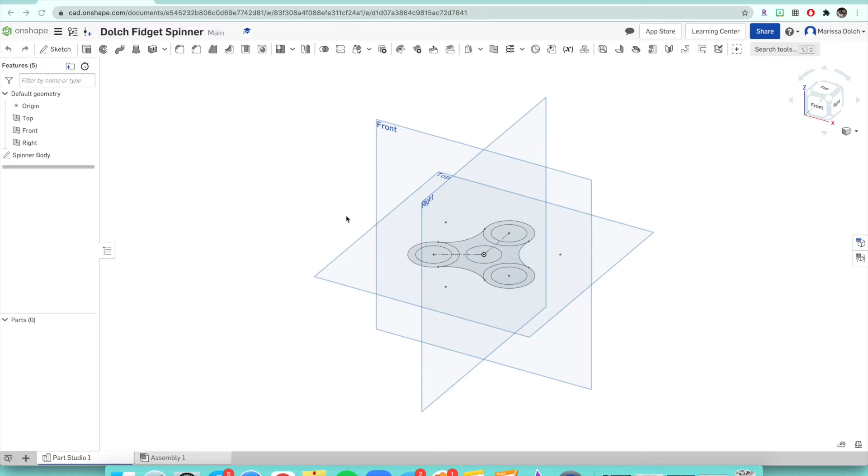Everyone, this is part 2 of the fidget spinner 5-part series, and now we are on to extruding our fidget spinner body. In the last video we created this beautiful sketch of our fidget spinner, and now it's time for the fun part: to see it come to life and extrude this.

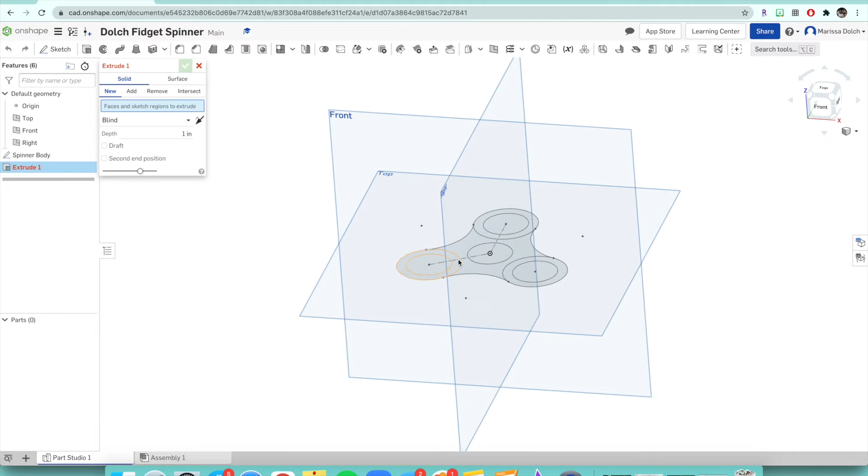So what we're going to do is click on the extrude button on the top right here. Now we have to select what we want to extrude. This part is very important, so I'm going to zoom in a little closer so you can see. We want to make sure that we only extrude everything but the inner holes.

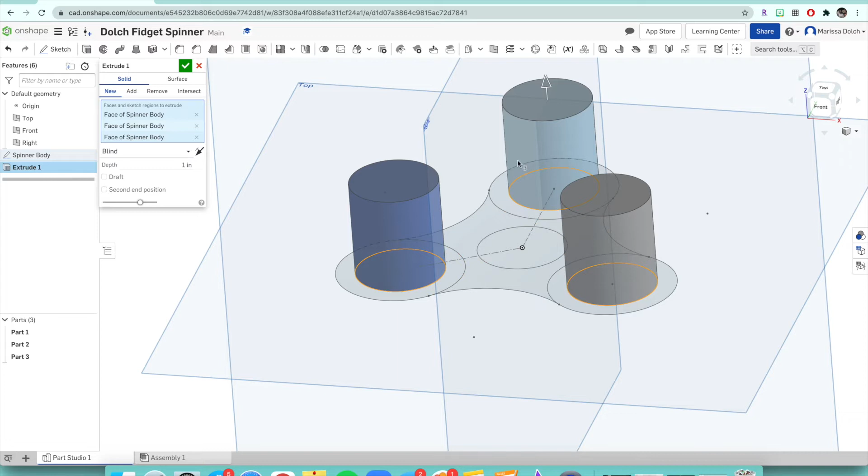So we don't want to extrude this, we don't want to extrude this, and we do not want to extrude this, right? We want those holes to have nothing in them. We want them to be hollow. We don't want any material filling up these holes. So let me get rid of that. That is what not to do.

What to do is click on this body part right here. It's okay that this is highlighted here, and we want something that looks like that. Now what we want to do, since this is still hollow, is fill in the rest of this circle so it goes completely around. So you're not going to click in here, because it's going to do that.

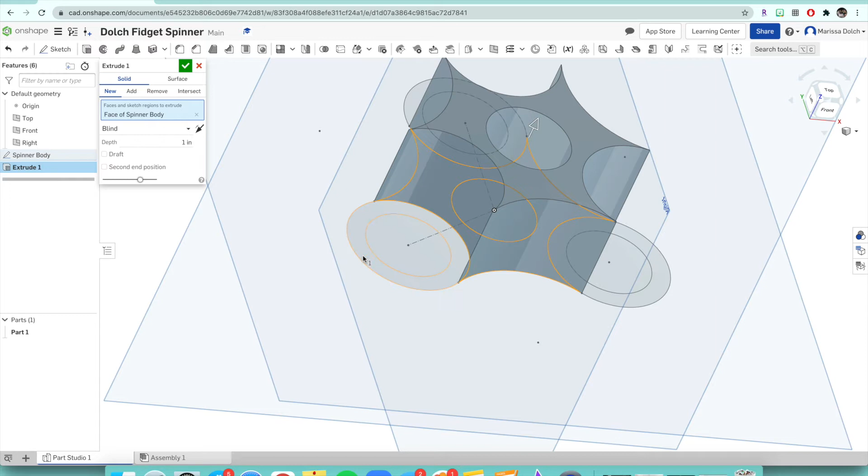But what we do want to do is click on that donut of the circle - not just the inner, both the inner and the outer. So it looks like this. And you're going to do that for all 3 of these holes, so it looks something like that. That is what your fidget spinner should look like so far.

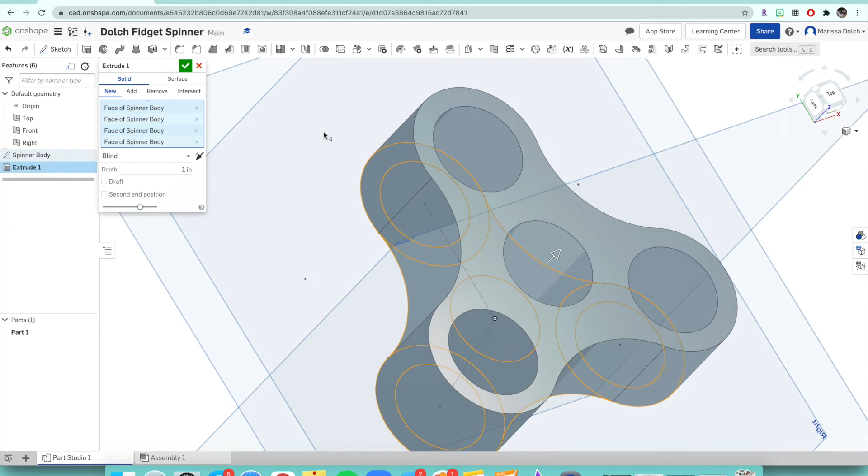So I'll just spin around again. None of these holes should be filled. If something's filled, you could always go over here and click one of the X's and figure out which one is the hole that you filled. We want all of these to be hollow. Once you're good with that, we're going to rename this extrusion and name it spinner body so we know if we have to go back and change something, we can.

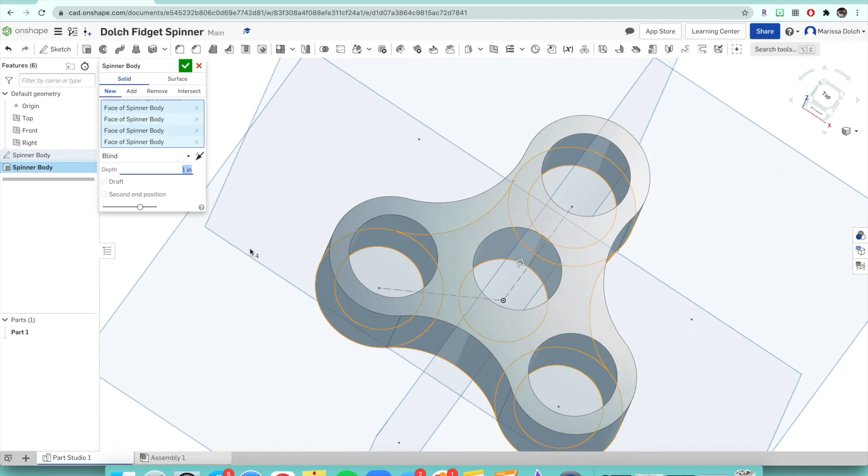Then what we're going to do is just change the depth. Right now it says 1 inch, which is kind of tall. If we're looking at this, it's kind of up there. So we're going to drop it down to 0.35, which is actually the standard size of a fidget spinner. If we look at it now, it definitely looks better - it's not as high up and it looks more legit. So now we're going to click that green check mark and we are good.

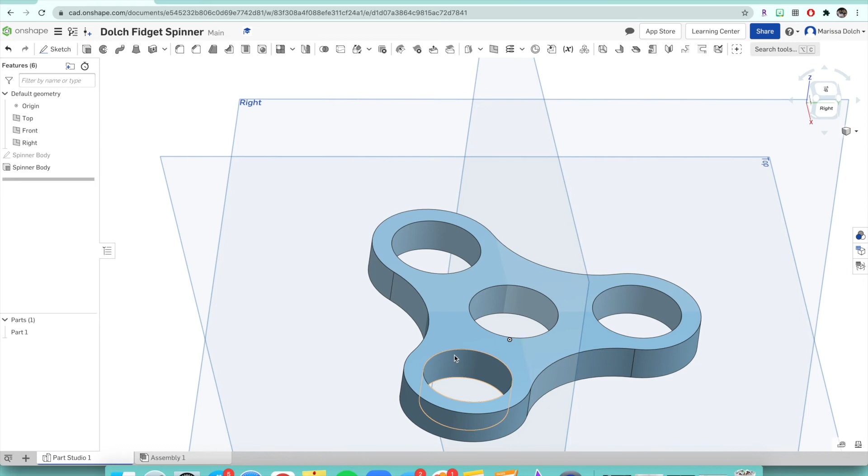Now the only other thing we're going to do in this part is round out these edges here, on the outer edges, not the inner edges. We don't want to mess up those beautiful circular holes yet. We just want to do it on the outer part of this fidget spinner, where your hand goes, because we don't want anything sharp - right now this is kind of rigid for your hand to lay on. We want this to have the safety factor, we don't want this to be dangerous for anyone to touch. So we want to round out and smooth out the edges like we've done with our other intro projects.

To do that, we're going to click on that fillet tool up on the top, and we are going to fillet the edges, which I'm going to change first so you can see, to 0.1, and click enter. Now we have to click on an entity to fillet. As soon as you see this, you'll see that only this line glows yellow, right? You're going to be like, oh Ms. Dolch, that's only that one part, that one little curve there. I don't want that, I want to do all the parts at once, right? Of course.

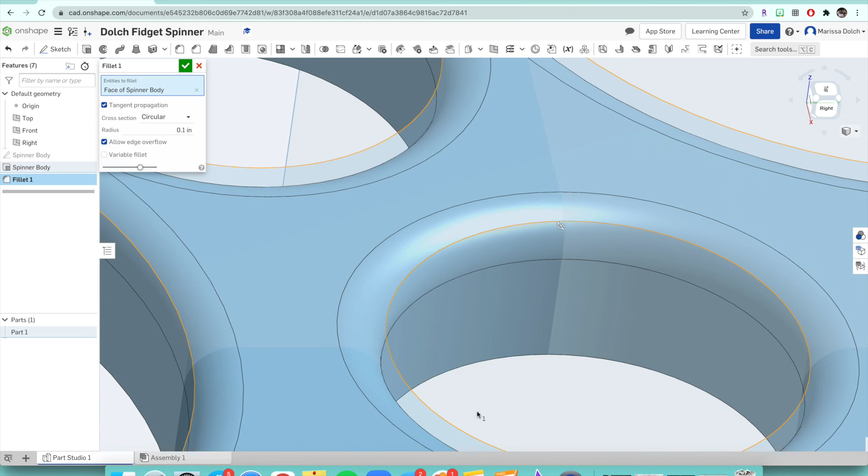Boom. Which is great, but like I said before, we don't want to round these little circles, because we want those bearings to fit in there nice and snug. So this, like we did here, yes it looked like it was going to fill everything in, but if we go back and see how that's highlighted yellow, even the inside is highlighted yellow. That's not good. So we want to actually click on that one arc line, and you'll see that'll only round out the outside how we want it.

So again, you want to only click on that one arc. It might look like it's only going to round out that one spot, but it actually rounds out the whole entire thing rather than everything. So we only want the outside. Do not arc the inside or flatten or fillet the inside - that's not what we want.

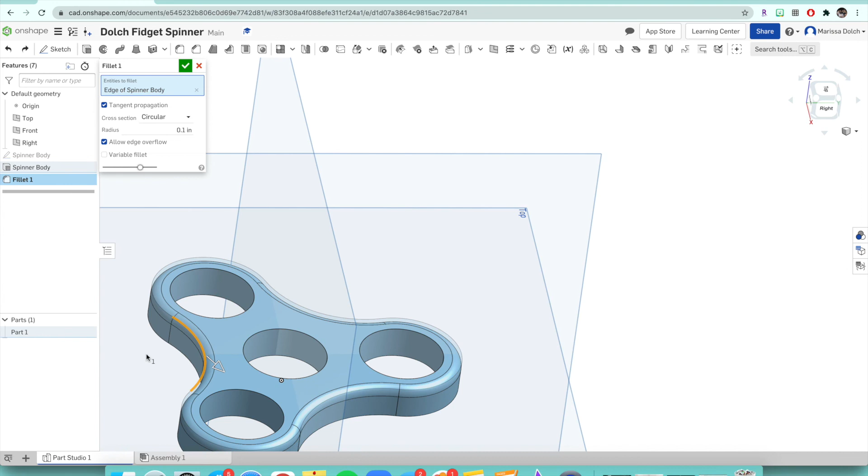So then once you get the top all good to go, you could flip it to the bottom. Same thing, you're going to click on that one edge, it should highlight, and it'll smooth out the bottom of your fidget spinner. You want to make sure, even with the bottom, that you're not smoothing out these holes. It's extremely important when we get to assembly.

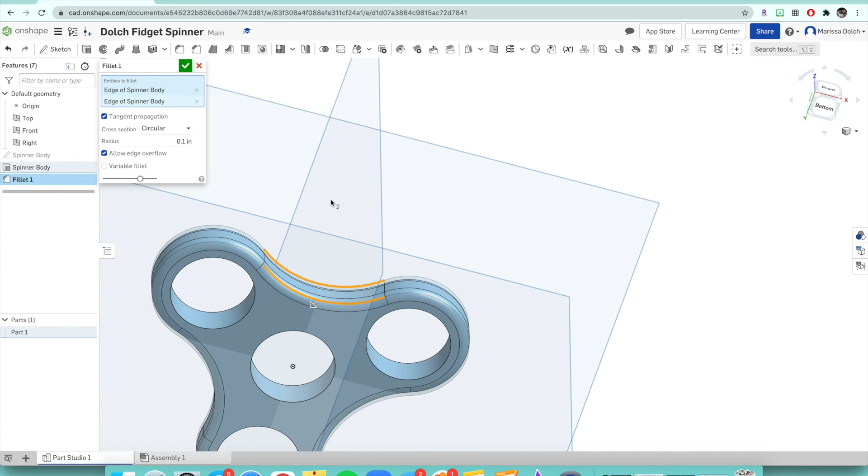So after that, you're good to go. You can rename this as well to spinner body. Click the check mark, and your spinner should look like this. If your spinner has those rounded edges inside of those holes, please make sure to fix that before we get on to the next part, and especially before we get to assembly so we can fit those bearings in.